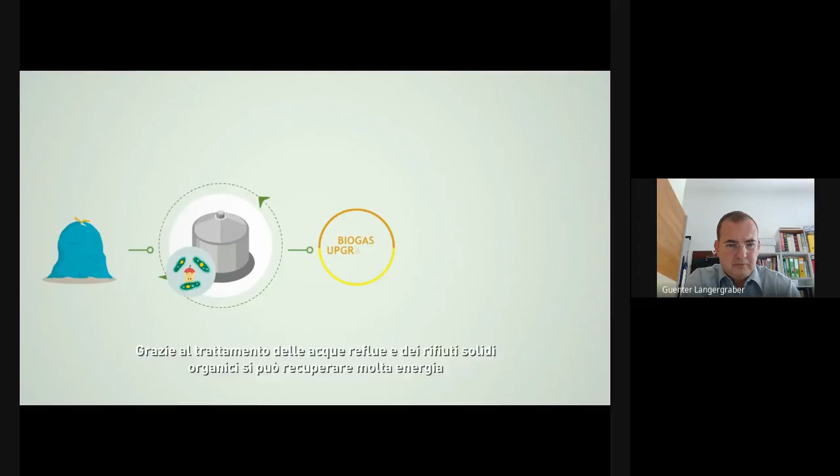Mr. Mayor, the Waste Collection Centre bill has arrived. Mr. Mayor, there is a lot of movement at the treatment center. Oh, how can we keep our city cleaner? Mr. Mayor, we need to update the plan for the Covenant of Mayors. Managing the energetic and environmental situation has become a difficult undertaking. Mr. Mayor, I'd like to show you something. What is this about? With this solution, we can apply circular economy to energy recovery. Thanks to the treatment of wastewater and organic solid waste, a lot of energy can be recovered. We can produce electricity from biogas, create new biomethane and new biofuel as well, and recover heat from the treated wastewater of your city. But how can we do that? With REEF 2W, the European project that gives us the tool to calculate the feasibility and the benefits of applying this method, so that the City Council can adopt the new solution, knowing precisely the investment and the benefits. REEF 2W, an Interreg project, offers the possibility to do a feasibility study and start-up aid to recover energy from wastewater and solid organic waste for a cleaner city in a way that is more efficient and more sustainable.

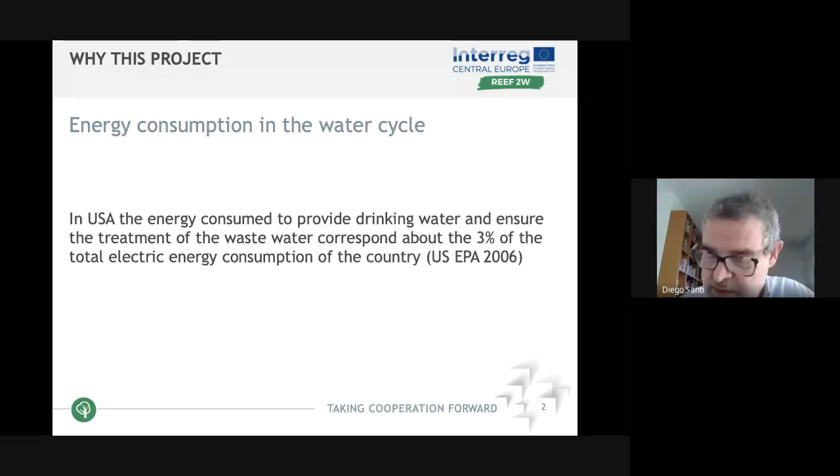The basic concept of the project is quite simple. Wastewater treatment plants and municipal waste plants are great consumers of energy. Here you have the situation in the USA, but in Europe, where we were not able to find aggregated figures, the situation is quite similar.

So a substantial amount of the electrical energy used in various countries is for the treatment of waste. But there is also some potential in the waste. We can, in principle, recover energy - thermal energy, chemical energy, other kinds of energy. The project has the objective of enhancing the energy efficiency of this kind of infrastructure, as well as producing some renewable energy to decrease the impact of the infrastructure on the environment.

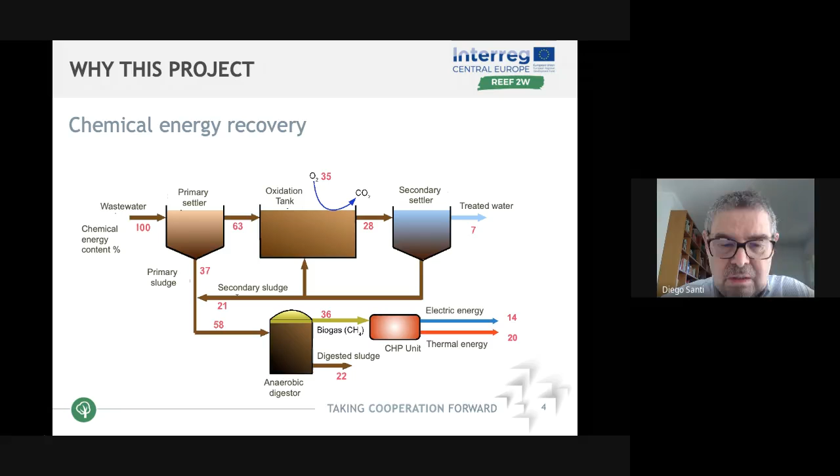Basically, you can recover from biomass and from wastewater chemical energy, producing biogas, and here you can see a principal scheme for the production of electric energy and thermal energy from the biogas.

The project has been set up to enhance this concept and involves 5 countries in Central Europe: Italy, Austria, Germany, Czech Republic, and Croatia. Among the 10 partners of the project, there are 5 private companies involved in the activities, for a duration of 3 years.

The scope of the project is to identify possible critical points for energy efficiency in waste treatment plants, to define strategies and technologies, and to evaluate possible scenarios for the waste treatment platforms, integrating, whenever possible, wastewater and other renewable energy sources. To provide an assessment of the excess of energy available that can be delivered as electricity, heat, biofuel, and so on.

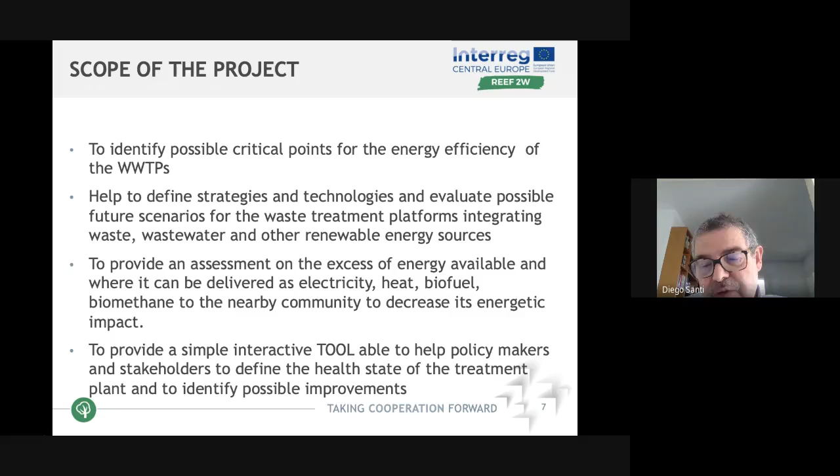To provide tools and methods, interactive tools, able to help policymakers make their decisions. To provide an environmental assessment of the actions implemented. And last but not least, to provide an economic assessment. All of us know the importance of economic issues in municipal life today.

Then we wanted to identify obstacles and barriers from a legislative point of view, and to involve local authorities to test the tool, use it, and contribute to its improvement.

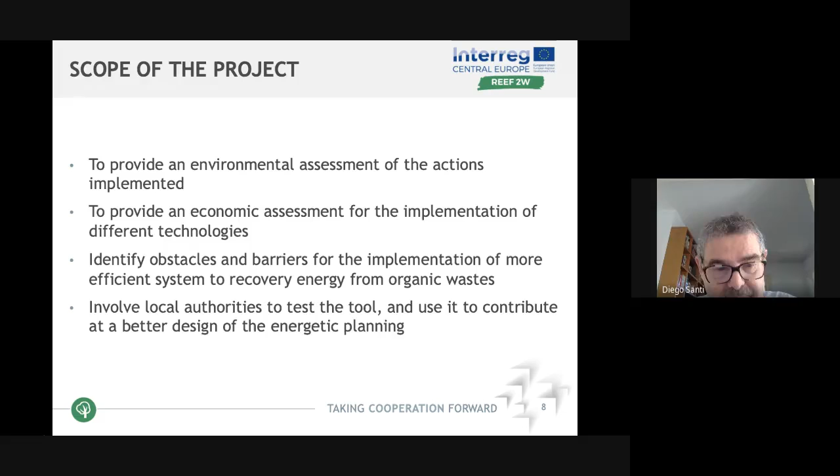In these pilots, we have considered a range of different technologies, but the tool allows for the improvement of these technologies in future, taking into account possible technical developments.

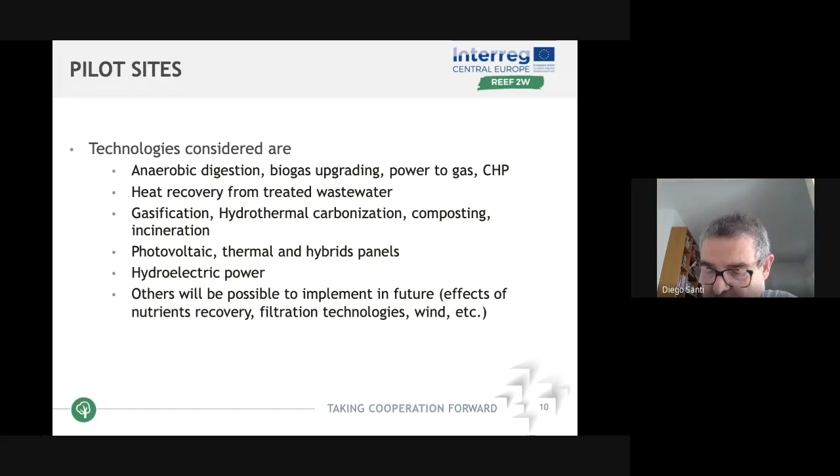The approach used in the project is an integrated sustainability assessment approach. That is, not only technical aspects are taken into consideration, but also the suitability of the locations of the plants and their impact on the landscape and on the territories. The overall environmental assessment and the economic assessment - all these aspects are considered in the tools set up by the project.

And in setting up these tools, we had a strong involvement of the users in the collection of data, but also in checking the suitability of the tools.

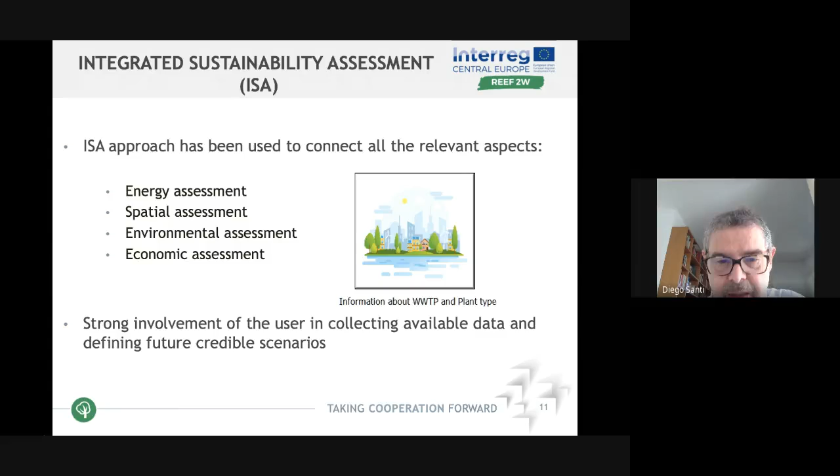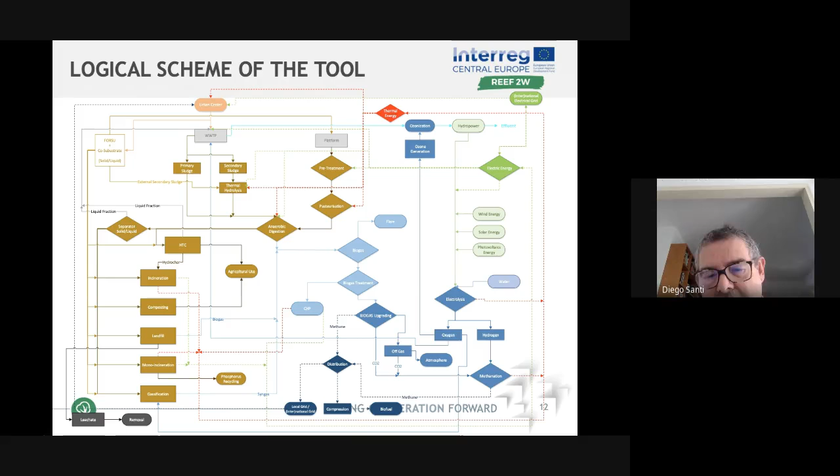This is a general logic scheme of the tools. Don't worry, we don't need to go through this scheme in detail, but in brown you have the waste treatment plants. In blue there is the water and wastewater treatment procedure, and in green you have the output of renewable energy produced.

At the end, you get a report comparing the initial situation of the plant with the future, improved situation, and the comparison is made across all these mentioned aspects.

The project organized a variety of other activities, such as training courses for groups of public administration and stakeholders delivered in all 5 participating countries, training experts and advisors to enable them to assist municipalities wishing to implement this kind of vision, and the setting up of action plans at regional and local levels to enhance the impact of the project.

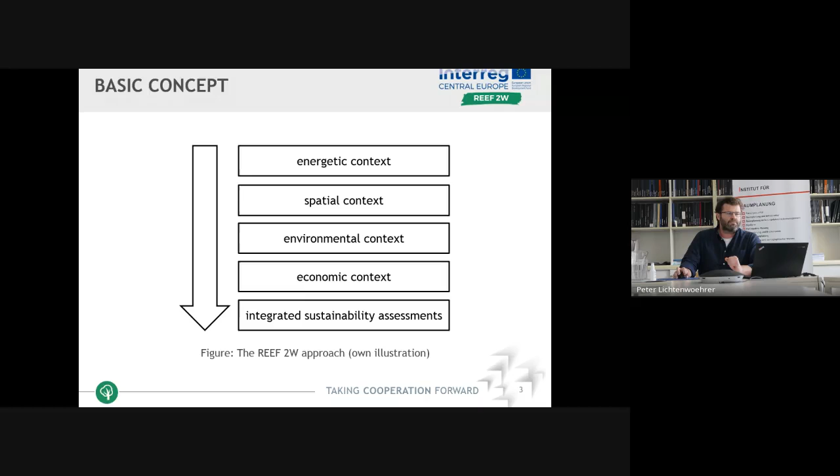We would just give an overview of the most promising path to follow. After our first pre-assessment in the REEF 2W, detailed planning can be the next step. We provide feasibility studies and information on whether it's worth following an idea, or if we should go another way. So this is about the approach.

On my next slides, I'll go into more detail for the different contexts. The first is the energetic context, where we address different issues. The first is energy efficiency. We want to identify optimization potential

concerning the energy use at a wastewater treatment plant. Wastewater treatment plants have different technical processes: pre-treatment, activated sludge process, sludge treatment. They need electricity and thermal energy. In our assessment of energy efficiency, we want to see whether the current energy consumption is efficient or if there is optimization potential.

The second thing in the energetic context is we want to identify all the available resources for the generation of renewable energy. Many treatment plants across Europe are already equipped with anaerobic digestion - we'll go back to that in the third presentation today - but it's not only about anaerobic digestion. We have different types of resources, like wastewater heat, solar energy, and more. We want to identify all the available resources at the treatment plant.

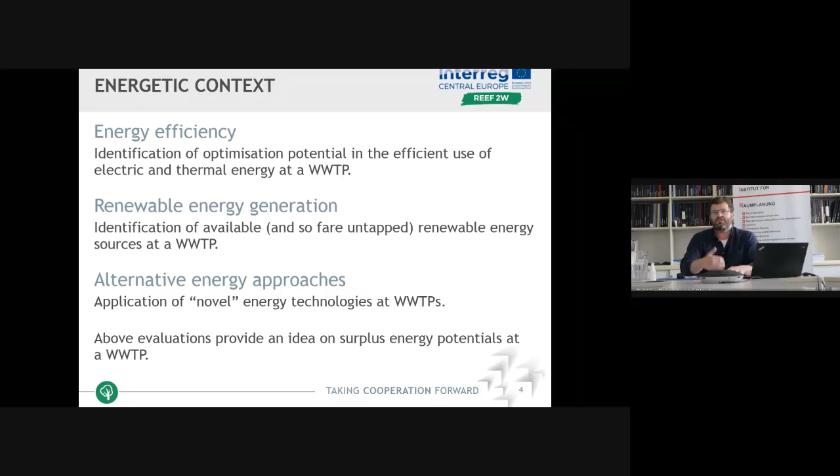For energy efficiency, it's about comparing the electric and thermal energy consumption at the wastewater treatment plant. Either we look at the entire plant or at selected treatment technologies, and we want to compare the current energy use with standard ranges.

We have different treatment steps, let's say energy consumers at the treatment plant, from an electrical and a thermal point of view. We have energy consumptions for mechanical pre-treatment, for biological treatment, for sludge treatment, and so on. We indicate energy consumption ranges for the different steps, or for the treatment plant as a total.

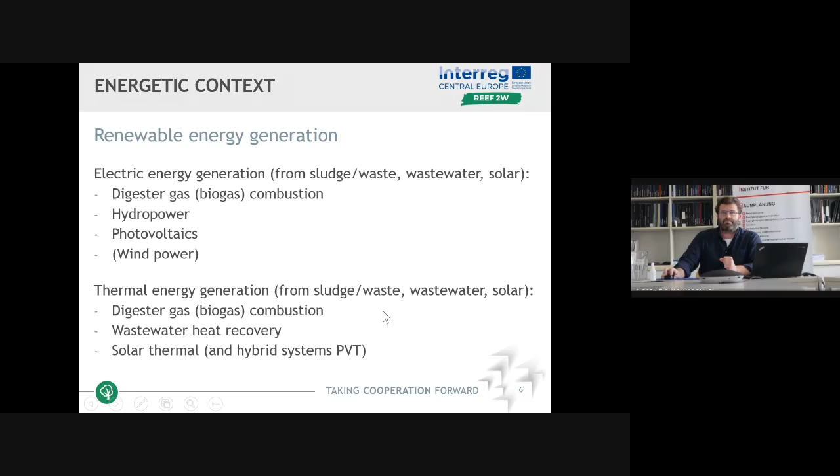So these are the two aspects: basically, we can provide electric energy and thermal energy. The biogas has a special position here, because we can also leave the biogas, upgrade it, and use it for feeding into the existing natural gas supply network, which brings me to the last aspect of the energetic context, the alternative energy approaches we consider in REEF.

The biogas upgrading can be one thing. Of course, it's quite obvious we could use the available digester gas in a CHP unit, combined heat and power unit, to produce electricity and heat. But we can also upgrade the biogas and feed it into the public network, which can be an alternative approach.

One important thing is that we want to increase the yield of biogas generation. We want to improve the digestion performance, and for that we address, in the REEF2W approach, the co-digestion and hydrolysis of the sludge or waste. The goal is to increase the biogas, because more biogas means more gas to be fed in, or more gas available to generate electricity or heat.

Another aspect is energy generation out of sludge. Sludge is a big issue; it has to be disposed of as well. Of course, anaerobic digestion of sludge has already been mentioned, but gasification or incineration of sludge can also be used to generate energy. Gasification can provide additional gas, for instance, and incineration is a big issue when also dealing with the phosphorus recovery approach—we have to incinerate the sludge.

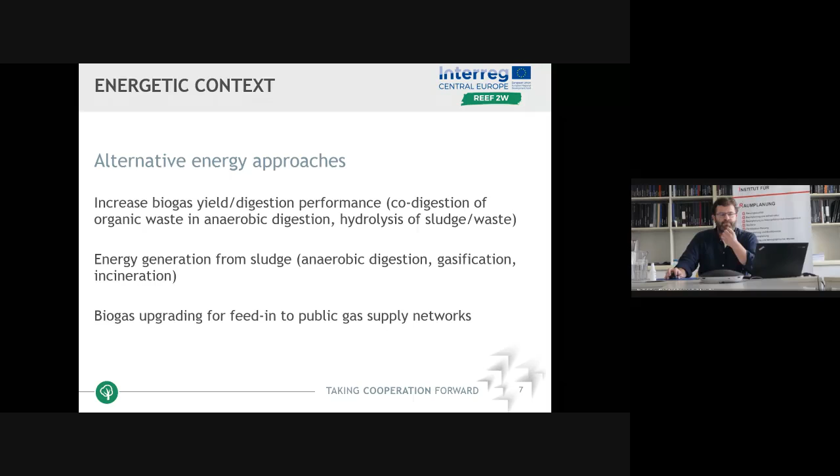But it's not only about the availability of surplus energy, it's also about the availability of energy consumers. Because if I have a lot of surplus energy but no consumers around, that makes things difficult. Maybe not so difficult for electricity supply, because electricity can easily be fed into the grid and transported over very long distances. Same for the treated biogas. But for heat, it's of course a bit of a different issue.

The heat is therefore very important. Diego also showed it on one slide, and we will also address this issue in the third presentation today. We have electricity at the treatment plant, but the treatment plant has high electricity needs, so usually it is very, very difficult to cover the wastewater treatment plant's internal electricity demand.

For selling the treated biogas, the gas can also be transported, but then the gas is missing at the treatment plant. So the question is always, is it economically interesting for me as an operator of a wastewater utility to sell the biogas? Because if I sell my biogas, I have to get the electricity and heat I need on my plant from other sources.

But what we have, and what Diego nicely showed on one slide, is a lot of heat available at the wastewater treatment plant, way more heat than can ever be used internally. So when dealing with efficient use and energy supply from wastewater or waste, we have to address heat supply. And for heat supply, the supply distance is an issue because we have heat loss.

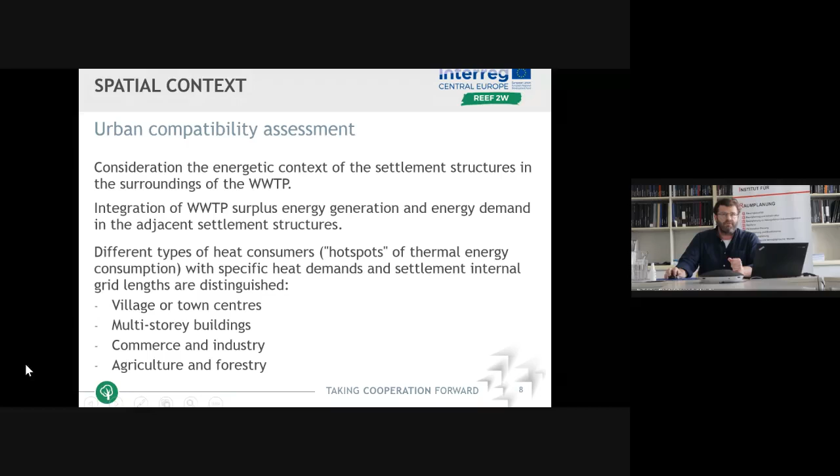Before we go on further, I just want to give you a short idea on this spatial context. We defined not only these different types of consumers, but we also tried to find good pictures, so that the user, the planner, or a municipality gets an idea from his ortho photograph: I have, in my specific context, this type of settlement structure, and out of the REEF2W, one can easily get the information on what the average heat demand of such a settlement structure is.

So it's basic information to make a rough estimation of whether my heat demand can be covered totally, or at least to a certain extent. This is what our spatial assessment basically is about.

And as I said, if the supply side and the demand side fit together, if we have surplus energy and related energy demand, we go a step further - then we can go to the environmental context and check the environmental benefits of our dedicated supply scenario.

To evaluate the environmental benefits, we actually address climatic benefits, in terms of CO2 emissions and global warming potential respectively. A suitable method to address these environmental or climatic benefits, in our point of view, is the life cycle assessment.

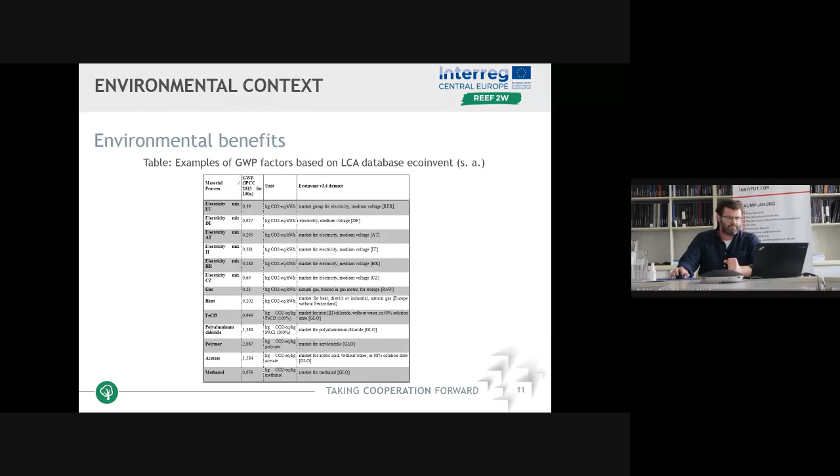In parallel, we are of course interested in the economic context. This is always a big issue. So what are the costs about? So the economic context in the REEF 2W should give us an idea of the economic opportunities of investigated supply scenarios.

We want to consider the economic aspects of the wastewater treatment plant-based renewable energy supply. For that, we have to define investment costs and operational costs, and we also have to consider additional income, which can come from, for instance, sell of excess energy, we sell excess heat, or we sell upgraded biogas, or we can also save some money when we improve our internal energy performance, when we have some energy savings. This has all to be considered and addressed in evaluating the economic opportunities.

And in our REEF 2W project, we also define cost ranges, which can be applied to the different supply scenarios, to the different technologies, and those will help us then to make first estimations on the costs of a specific scenario, and it will help us to compare the costs of different scenarios, then to get an idea which seems to be more interesting from an economic point of view.

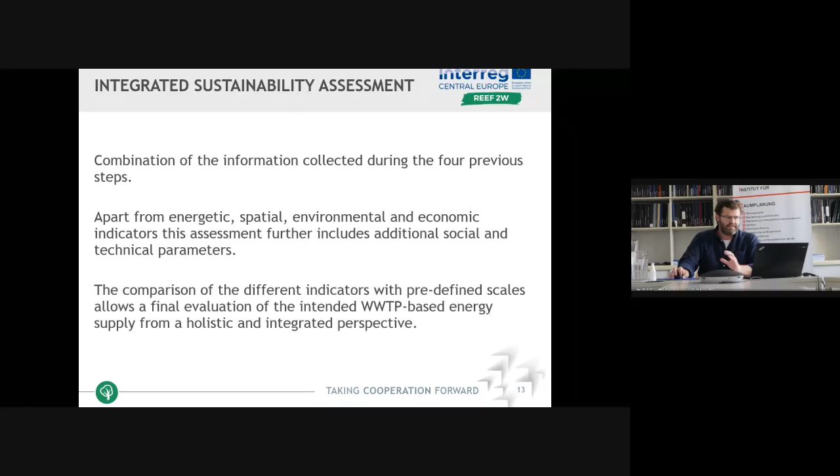So these two approaches are possible in the REEF: a more general view where we leave the detailed decision to the local stakeholders, or a less flexible, more strict approach, where we suggest weighting factors and REEF provides then somehow a final idea which are the most promising solutions. So this is the basic idea of integrated sustainability assessment.

To summarize this approach in a figure, I want to show you this pyramid. We start at the base with a pre-assessment on some general indicators. These general indicators give an idea whether it's worth going a step further. If these indicators are fine, then we continue with the assessment.

We have specific indicators that address environmental or climatic issues, social aspects, economic and technical aspects. Technical aspects primarily concern energetic aspects. Out of these different indicators we can make the decision on the most promising, most sustainable supply scenario.

Either we weight these aspects directly, or we don't weight them in advance but provide all the different indicators in a traffic-light-like scheme. Then we have a big picture with all the indicators in traffic light colors - some parts green, some red, some yellow. The local decision makers then have the opportunity to say, okay, this is quite yellow, but it's not so important for me because this issue is important in my context. The color is not so important, the context is important. So the local decision makers can really include their local boundary conditions and perceptions in decision making.

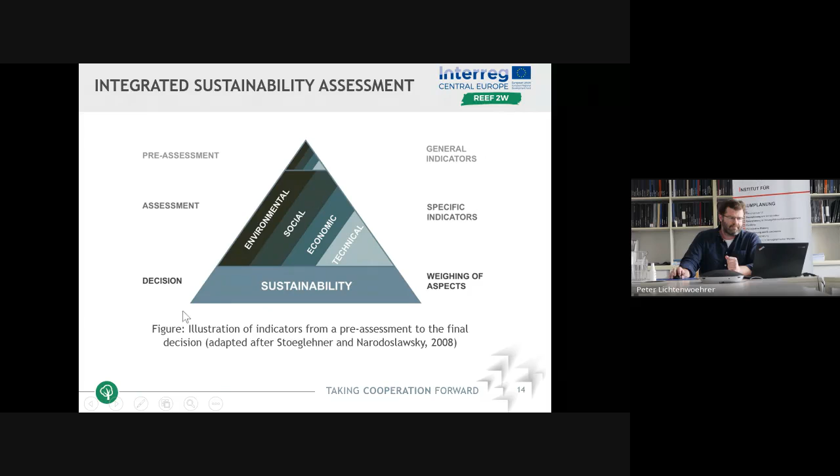So this is the basic idea of the integrated sustainability assessment - to define indicators for all the different perspectives or contexts we address in REEF2W, to finally allow a decision from an integrated perspective, to get an idea what the most promising scenarios are to be followed in subsequent detailed planning.

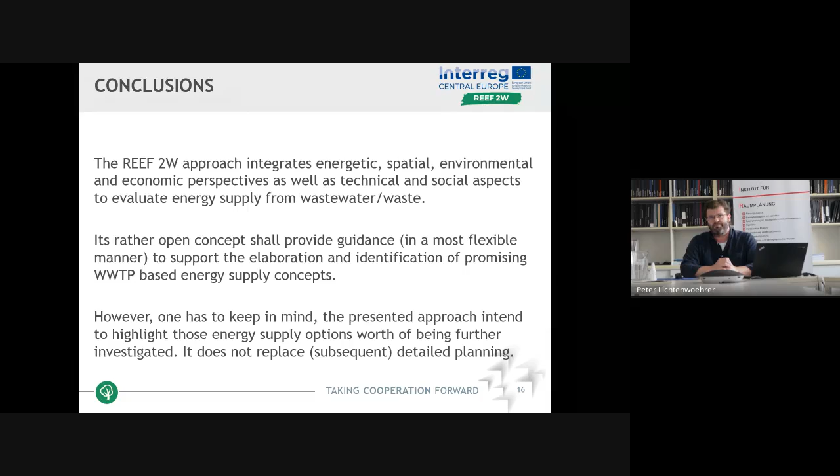The local operator should keep his freedom anyway. So one has to keep in mind, our REEF2W approach intends to highlight the most promising energy supply scenarios, the most promising options for how to integrate wastewater treatment plants or waste plants into a local energy supply concept, but it does not provide the best final solution. We do feasibility studies - we want to highlight those options which are worth further following into detailed planning. So this is what I had.

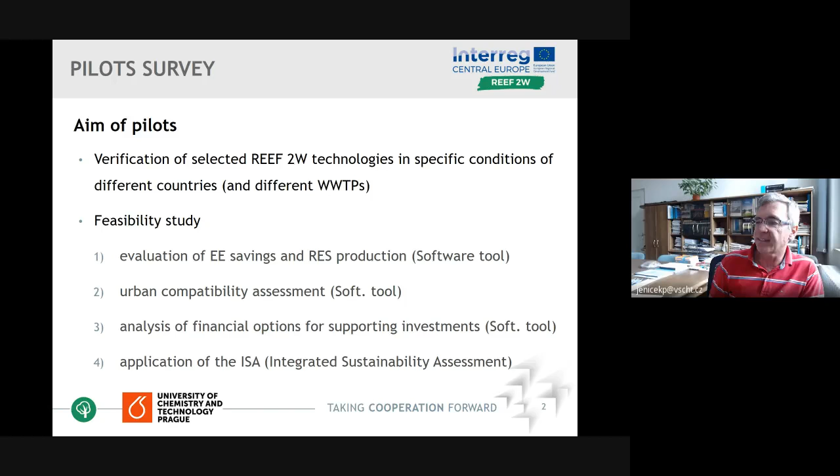So in this part we are able to compare the status quo and the innovative technology which is tested from a holistic point of view. In this short introduction I don't want to go too much in detail, so now we will present this pilot. Each project member country evaluated a specific type of technology in a pilot.

As you can see, in Austria the pilot was focused on thermal energy recovery from wastewater. In Czech Republic it was biomethane production, upgrading of biogas to biomethane. In Germany, thermal hydrolysis and power to gas technology. In Croatia, co-digestion, and in Italy, biogas production optimization. So this is a very brief introduction of the case studies and pilots, and now we will introduce them country by country.

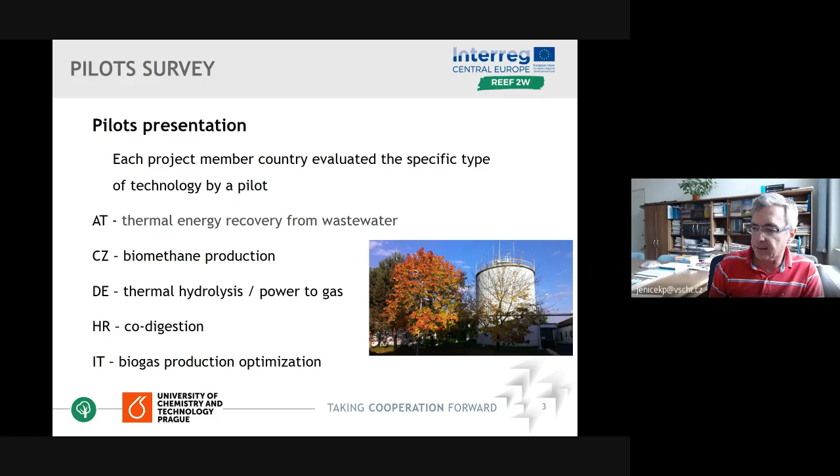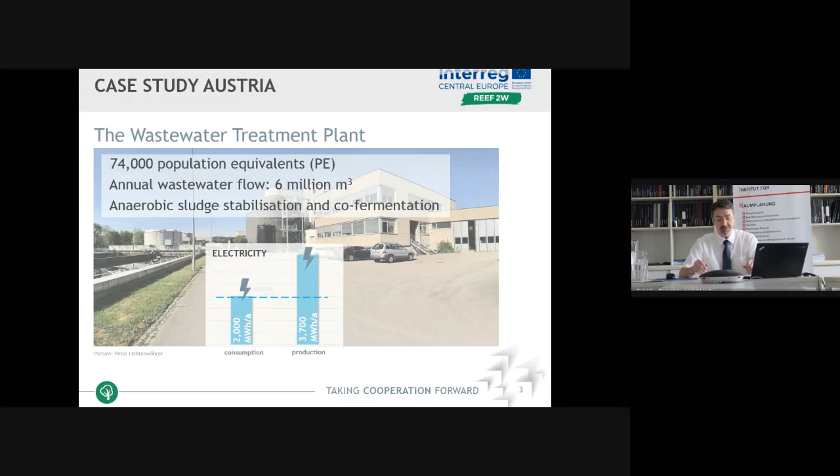Only at certain times over the year is it necessary to purchase relatively small quantities of electricity from the grid. Feeding in of surplus electricity into the grid is easily possible, but feed-in tariffs have become extremely unattractive in recent years, so it is interesting to strive for other own usage possibilities.

Concerning the heat side, wastewater treatment plants with digesters have considerable heat demands, but due to the co-fermentation in the Austrian situation, heat surpluses can also be achieved in the pilot case.

But for making use of heat surpluses, it is necessary to design the respective heating networks to supply other consumers. A first step in this direction was already taken by the wastewater treatment plant, in our case study, by supplying a nearby located farm.

The aim of our pilot action in the REEF project was to explore further possibilities to increase, on the one hand, the energy output, and to make visible, sensible uses of the respective energy surpluses.

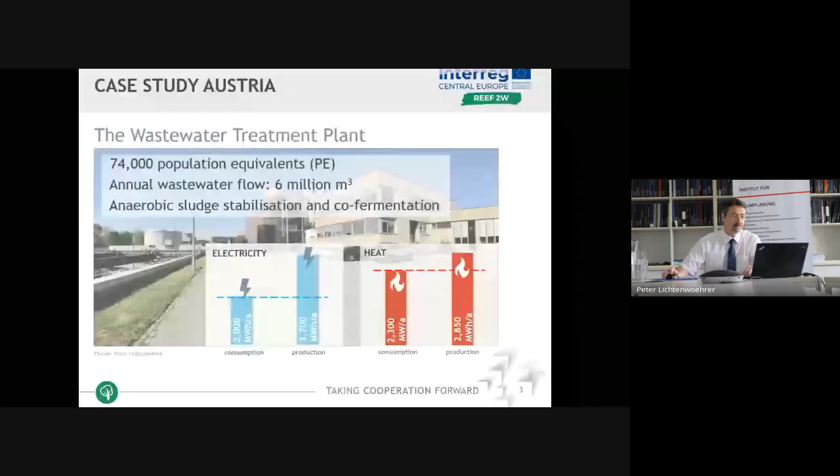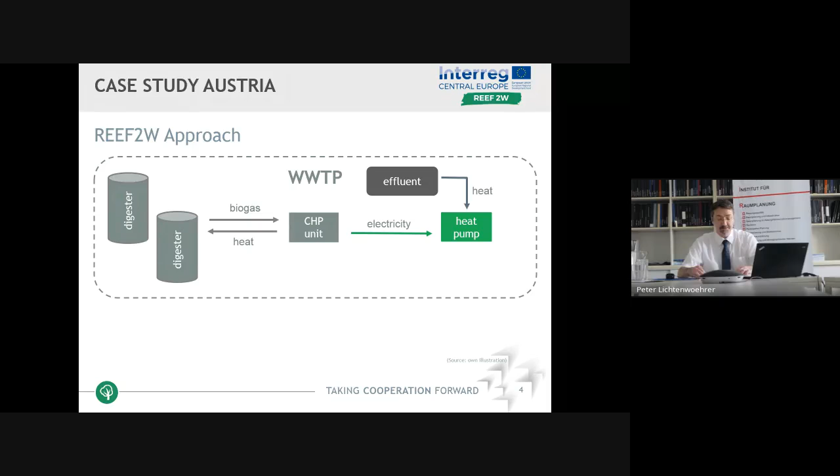This enables recovery of ambient heat contained in the wastewater, and of course is connected to further electrical energy demand for this purpose, but this can partly be covered already by the surpluses of electricity generated in the wastewater treatment plant.

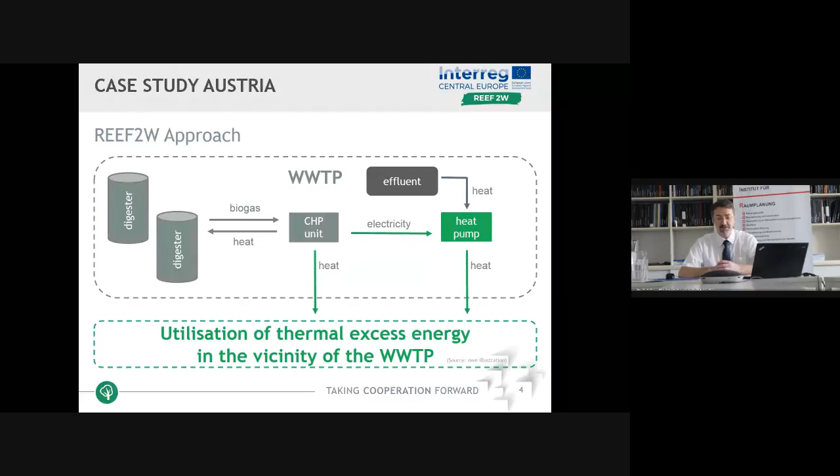In this way, the wastewater treatment plant can also provide more heat to external consumers, and in this way can assume a supply function in the local energy system.

The next slide should illustrate this potential of wastewater heat recovery. We have a mean wastewater flow in our case of around 6 million cubic meters of wastewater, and this volume is steadily available. This effluent is discharged continuously.

When we look at the average temperature of the wastewater, over the year it is around 14 degrees. In the winter months it's a little below 10 degrees. We can make use of this thermal energy, extracting it from the wastewater by means of a heat exchanger. For instance, as indicated in this illustration, a reduction of 2 degrees...

Georg, the microphone is not switched off at the moment. It was maybe... automatically.

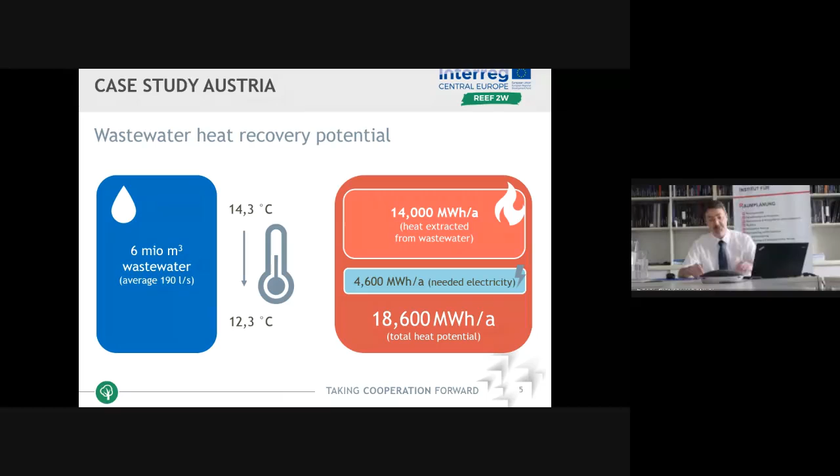And then the question arises only whether there are corresponding heat consumers located around the wastewater treatment plant, and therefore it is worth looking over the edge of the wastewater treatment plant. This is what we have done in our case study, applying a spatial analysis.

From our case study, it can be concluded from the REEF2W approach that, on the one hand, from an energetic point of view, wastewater heat recovery increases energy efficiency. It makes it possible to use not-yet-used energy sources, as the heat contained in wastewater becomes accessible. In economic terms,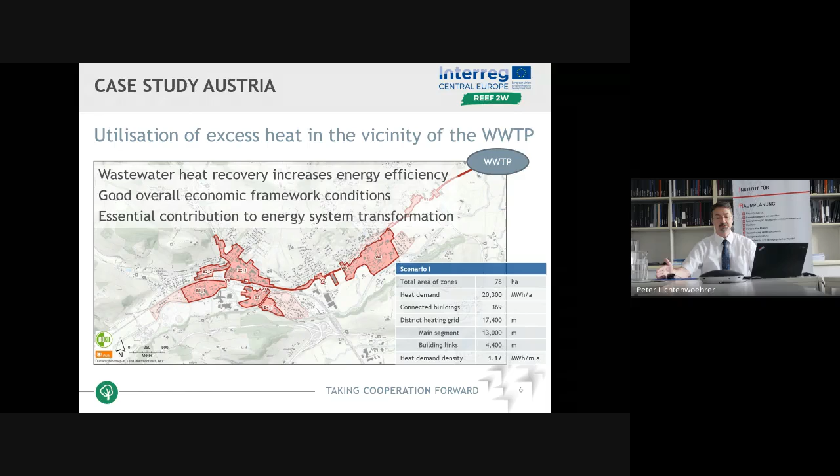So, a very short, brief introduction of what comes out of the Austrian case: that REEF 2W solutions, addressing the so-far untapped wastewater energy potentials, could make good contributions to sustainable energy supply.

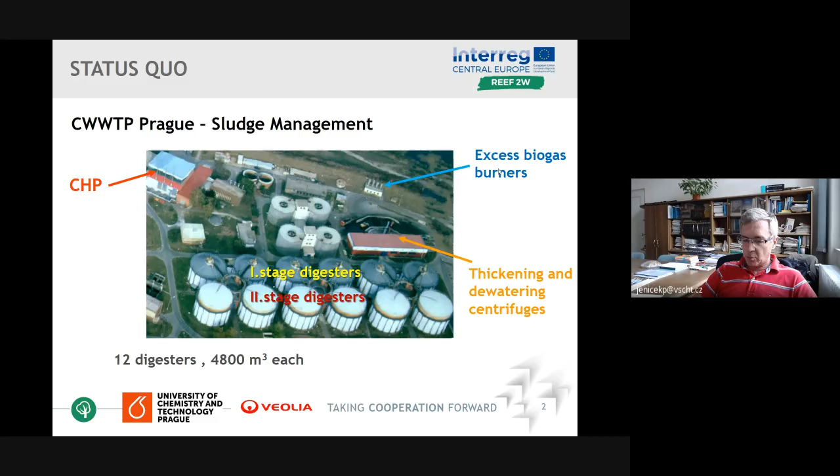So this was the reason why we decided to focus our case study in Prague on upgrading biogas to biomethane, and the main objective was the assessment of energy valorization of excess biogas through this upgrading technology. So what are the current data about biogas production in Prague?

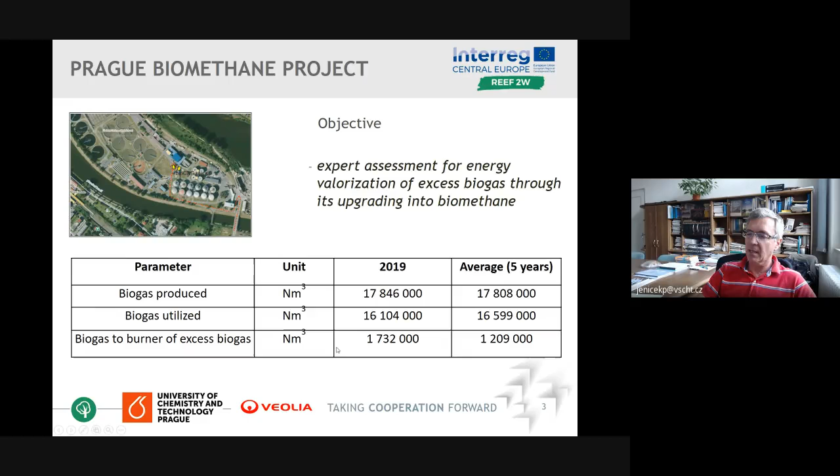Nowadays there is an annual production of biogas of about 17 million cubic meters, but the capacity of the CHP unit is not sufficient, as I mentioned, so biogas utilized for electricity and heat production is only about 16 million. So the biogas which is burned as excess biogas is almost 2 million cubic meters nowadays. On average for the last 5 years it's a little bit lower, but still a very significant excess of biogas production.

In fact, there are two ways how to solve it. One of the ways was increasing the capacity of combined heat and power production, or application of new technology.

In Prague, because of the aim of diversification of biogas use, it was decided to test the technology of biogas upgrading. So here is the pilot unit for the verification of this technology. And what were the pilot achievements, or what data can we find?

It is necessary to stress that we are comparing two scenarios: either the biogas is incinerated, or this part of excess biogas, which is only about 10 to 15% of produced biogas and is now not used, is upgraded. So the capacity of the biogas upgrading unit is 20 to 250 cubic meters of biogas per hour.

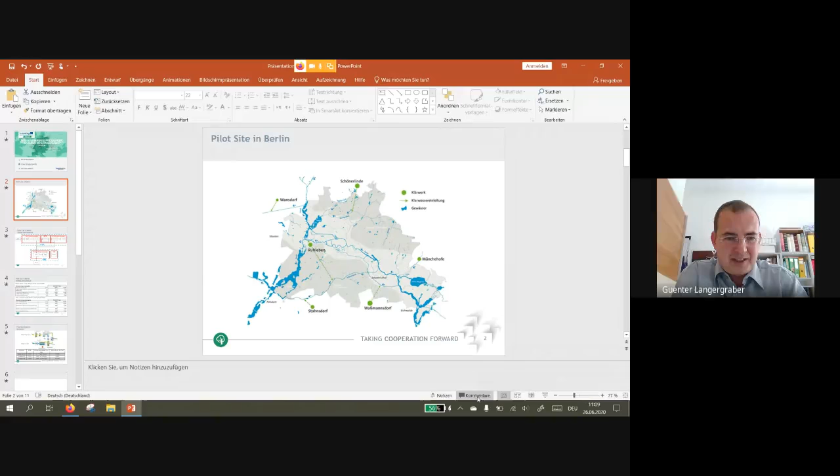So Mehdi, please. Can you hear me? Yes, we can hear you. Okay, now it's... so you can see my presentation? No, we almost saw it, but now it's gone again. Ah, okay, so I'll try again. So, now? Yes. Okay, perfect, let's start.

Thank you, and let me briefly introduce myself. I'm Mehdi Habibi from Competence Center of Water Berlin, and today I would like to present the case study in Berlin.

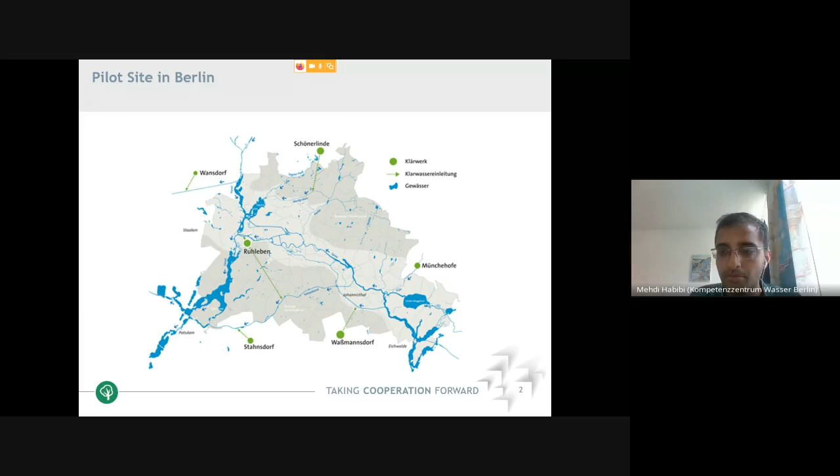First of all, the selected wastewater treatment plant is one of the 6 operated by Berlin Water. Let me give you some background information: this wastewater treatment plant consists of mechanical treatment, biological treatment, and advanced treatment. We also have a digester for the biogas, which is produced and used in the CHP system.

It was also important to know the energetic data, so as you can see, I show you this energetic data. Most of the energy is used in the biological treatment, and these 3 steps include almost 81% of energy, while the digester and digestion consume about 19% of energy.

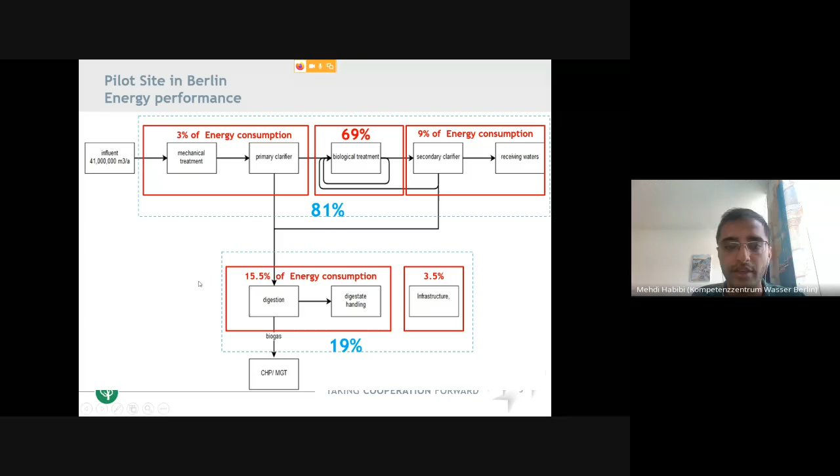So we also used this data in our REEF tool, first to check up the energy situation in this wastewater treatment plant. As you can see, this wastewater treatment plant consumes about 23 kilowatt hours of electricity per year.

And as you can see, it was in the standard range in the REEF tool. Also regarding the thermal energy, as you can see, it's about 13 kilowatt hours per year, and it's also in the range, in the middle of this range. So as a whole, we could say that this wastewater treatment plant performs well.

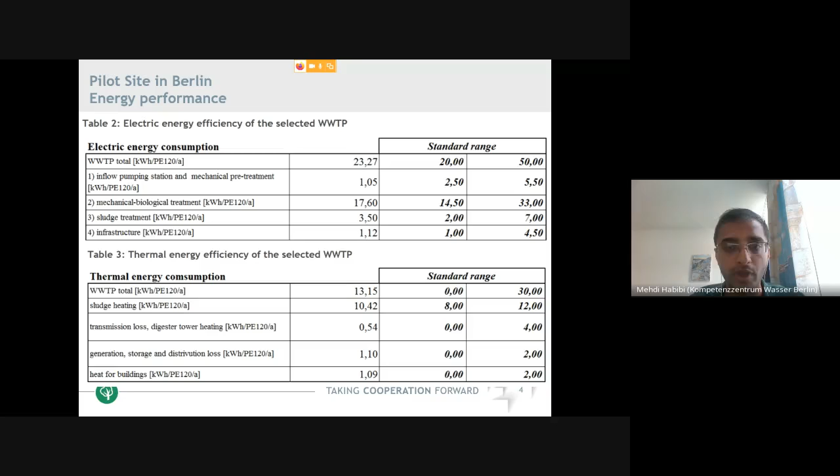In the next step, as you know, in Germany the regulation is changing. So for many wastewater treatment plants and also biogas plants, burning the biogas in a micro gas turbine or CHP plant is not sensible.

So the other options are to upgrade this biogas or inject it into the gas grid. In the case study in Berlin, we tried to test 3 options: thermal hydrolysis, biogas upgrading, and power to gas. Because of time, I'll just present 3 scenarios that we selected for today.

The first scenario is biogas upgrading: we take the biogas, desulfurate it, and after separating the CO2, inject it into the gas grid. We also considered power to gas, which is important with the new strategy in Germany. Water goes into the electrolyzer and is separated into hydrogen and oxygen, and we take this hydrogen into our biological methanation process with the CO2 from biogas upgrading to produce more biomethane.

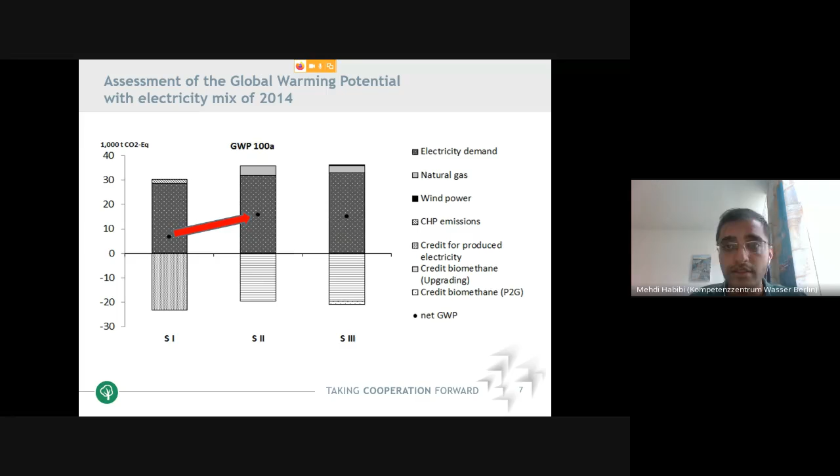In the next step, we also compared the electricity mix of Germany in 2030. We have a lot of renewable energy, so it would be a good option. We can reduce the global warming potential in this plant if green electricity is in the grid. And also with power to gas, you can see we can decrease the global warming potential in this plant.

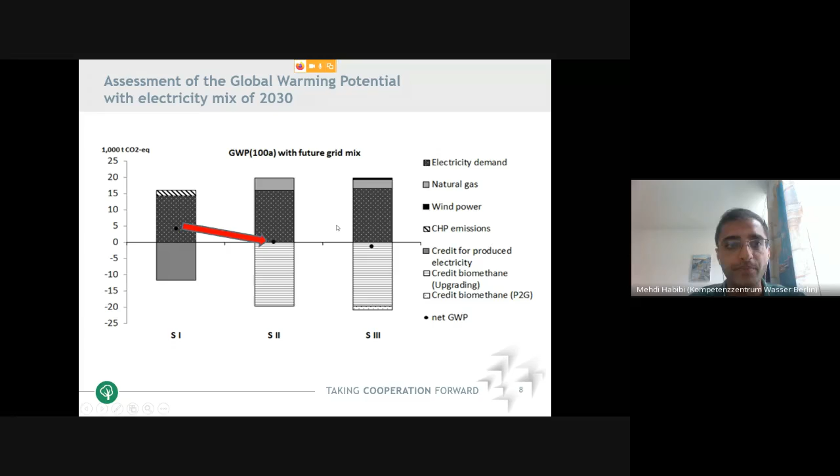So as a take-home message, biogas upgrading and injection into the gas grid at the moment shows no reduction of global warming potential. It's better to produce electricity with the CHP system and substitute the current power mix with its high global warming potential.

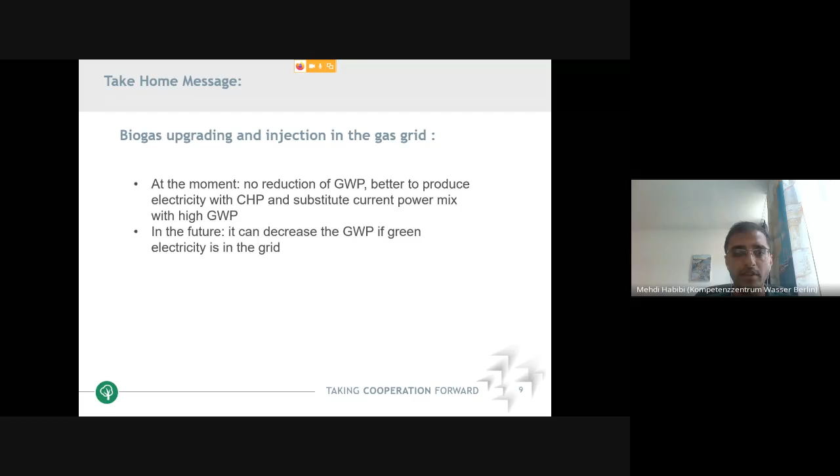But in the future, in 2030, it can decrease the global warming potential with green electricity in Germany. And regarding power to gas, it can decrease the global warming potential, but only if the electricity used for this process is green, renewable electricity.

We also did a lot of economic research for this process, but at the moment power to gas has high investment and operating costs, so it's not currently a good option.

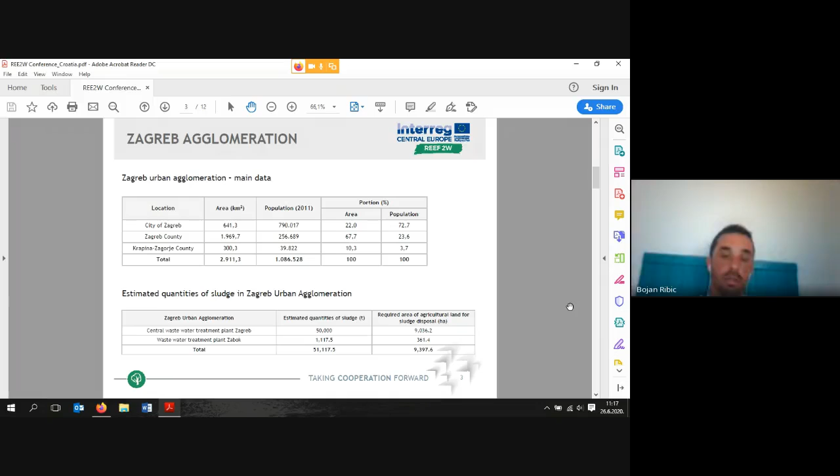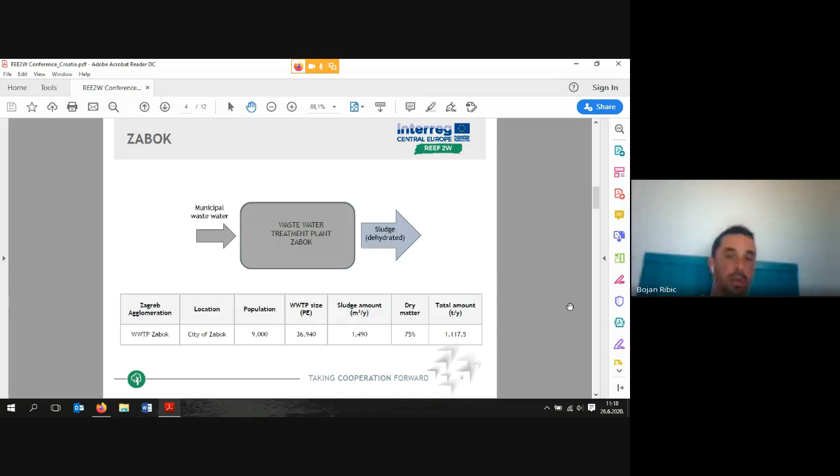Zabok wastewater treatment plant, as I said, they are doing the usual wastewater technology for the wastewater treatment plant. Their population is around 9,000 inhabitants. Size of the wastewater treatment plant is much larger due to the fact that they have plans to use the wastewater from other areas in this county, and these are the sums. In the table you can also see some other figures, especially the sludge amount and the total amount that will be expected annually.

First thing is, as Pavel mentioned earlier, in the Croatia case the focus is on co-digestion. So first thing was to introduce the possibility to use a bio-waste fraction of municipal waste. In Croatia, regarding waste management since 2017, we have a legal obligation to start to separate our bio-waste. So we saw this as one big energy potential to be used in the wastewater treatment plant if possible.

Other thing is anaerobic treatment. As I said, we have an obligation to build a lot of wastewater treatment plants in Croatia, but usually anaerobic treatment is not something that's been considered so far. And of course, the idea is to have co-digestion, sludge and bio-waste.

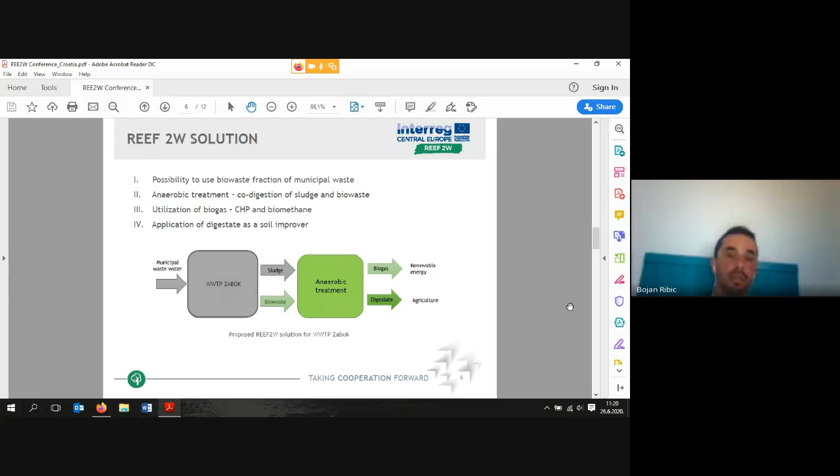So the idea is to use it as a soil improver in agriculture.

So we did a really deep analysis of all the information, all the data that we had about the mentioned location. Total amount of the municipal waste, the potential of the bio-waste, the expected amount of the bio-waste, also of the collected waste, and of course we did the biogas potential. All of this information is part of our case study, and they are all part of the feasibility study that we did, focusing only on the wastewater treatment plant in Zabok and the potential that they have at the moment.

We did also the calculation for that, and of course, as I mentioned, we are thinking that some land is necessary to utilize the sludge. So we also did a calculation of how big the land size should be to properly use that increase of sludge production.

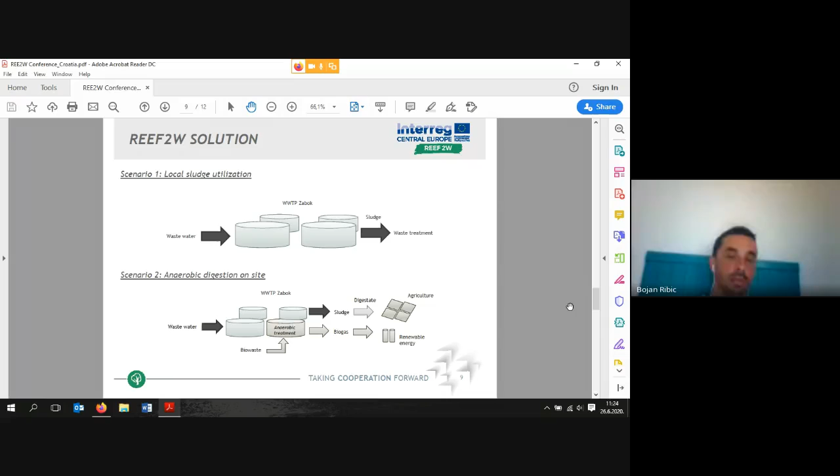And the third scenario was something a bit different. So we said, okay, if it's a problem to do any extra construction in the current wastewater treatment plant, let's then use the sludge and the bio-waste in the dedicated biogas plant that is existing at the moment. But of course, this is a remote biogas plant.

In Croatia, we have, I think, about 30 biogas plants. Their main source of energy is energy crops. We haven't had so far any construction of biogas plants that can also use the bio-waste, especially the municipal bio-waste.

But this is something that will, I'm sure, arise in the future, and there will be more and more biogas plants, or maybe the current biogas plants will be upgraded in order to be able to utilize and treat the separately collected bio-waste from the municipalities.

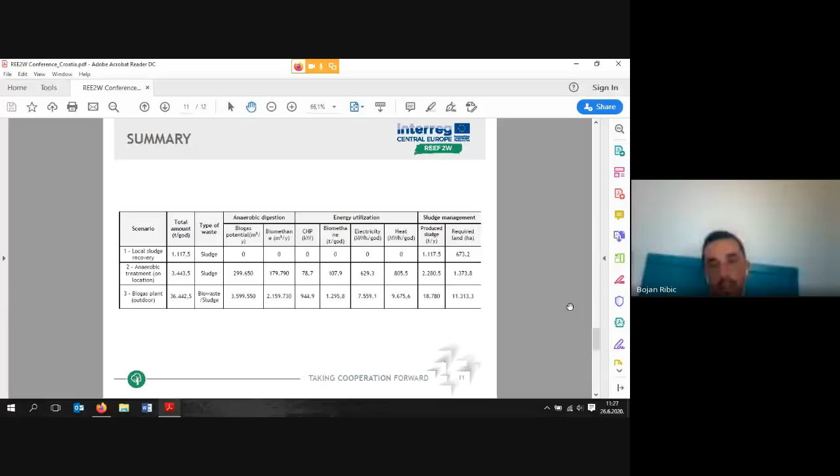And then, last but not least, we move from Zagreb across the Adriatic Sea to Montefeltro, close to Rimini, and Daniel Limongi will present us the case study from there.

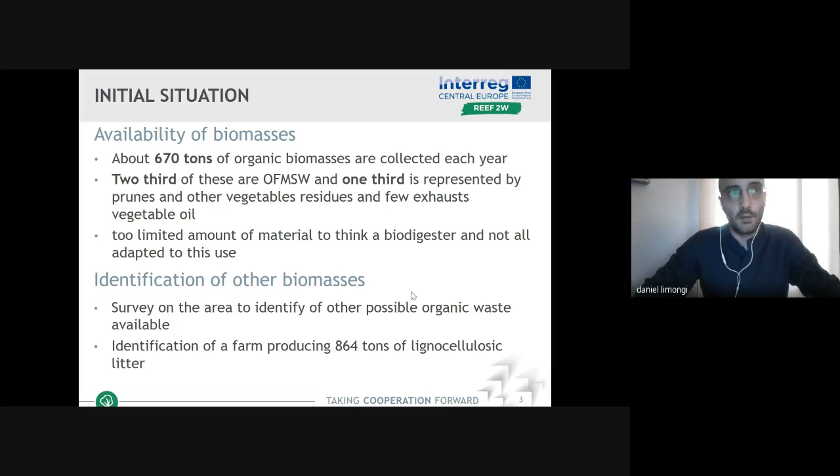The collected waste contains a large proportion of dry organic waste that unfortunately cannot be used for anaerobic digestion. I'm talking about 670 tons of organic biomass, divided into 2/3 organic fraction of municipal solid waste, and 1/3 represented by prunings and other vegetable residues and a small amount of exhaust vegetable oil. To increase the energy production potential, not only the collected dry organic material was considered, but also the availability of other lignocellulosic materials collected from agriculture or industrial activities.

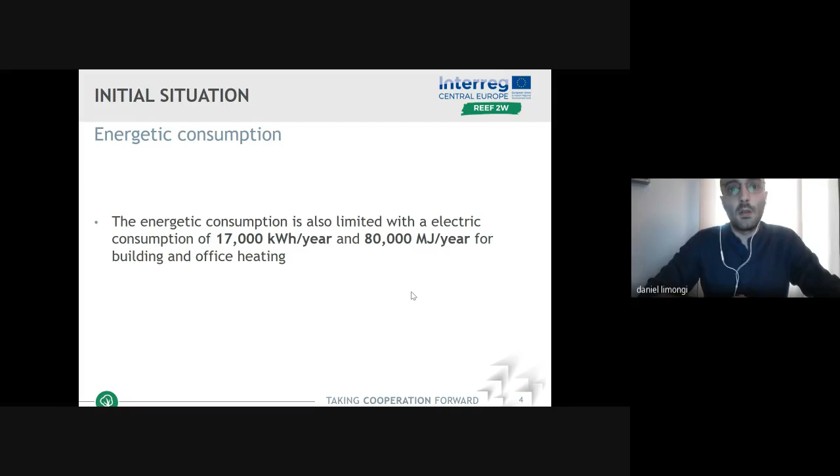The company has already conducted a survey of the energy consumption of the different production facilities and offices. The results highlighted the following average values per year. There is no energy production at the plant at the moment. There is a plan by the company to relocate different working sites and offices into one place to optimize space and working time.

For this reason, there is strong interest in evaluating the possibility of identifying technologies capable of recovering energy from collected waste. Gasification technologies represent one of the most probable options, as they can be used with locally available materials, offer the possibility of combined electricity and heat recovery, and can be switched on and off as required. Another interesting aspect of the gasification process is that the end products are ash and biochar.

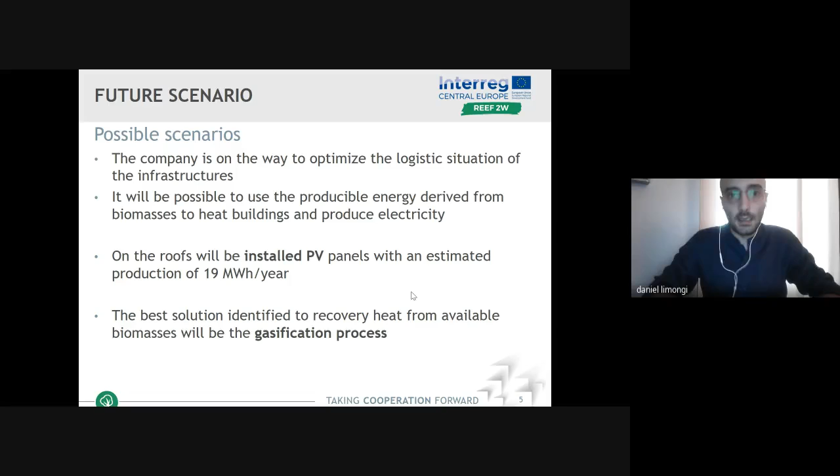The ashes provide inorganic elements that can be reused in agriculture and could also be used as inert material in building or road construction. Biochar is a carbon concentrate that can be used in agriculture to retain carbon for neighboring plants. All three scenarios we evaluated in terms of gasification involve energy production from photovoltaic for a total of about 19 megawatt-hours per year. Three different scenarios are considered.

In the first scenario, only the biomass already available at the treatment plant, without the organic fraction, has been considered. In the second, the available biomasses have been integrated with exhaust mushroom litter. In the third scenario, all available biomasses, including the organic fraction of municipal solid waste, were considered.

This section will provide a brief analysis on the advantages of renewable energy use in the treatment plant of Montefeltro Servizi, according to the results obtained using the REEF 2W tool. The results are based on actual energy consumption provided by the company, and take into account the possibility of installing photovoltaic panels on a roof area of about 100 square meters, and a gasification system that can be used with available organic waste. The following graph shows the total energy consumption in kilowatt-hours and in standard cubic meters.

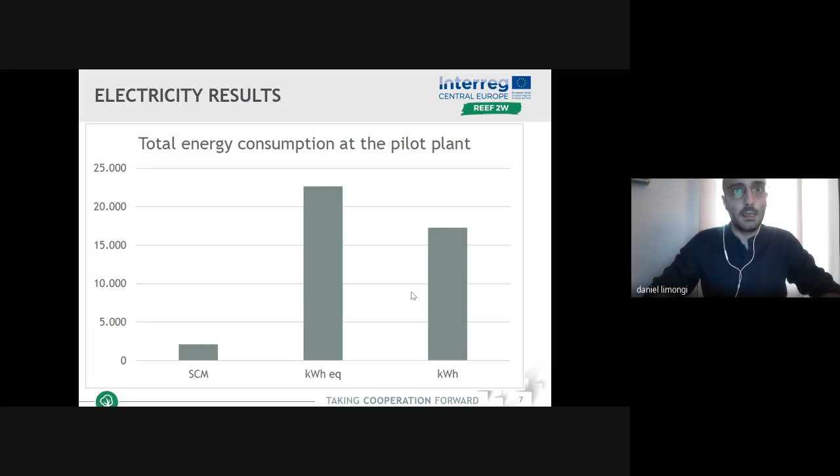For a simpler comparison of the two values, standard cubic meter is given in kilowatt-hour equivalent. The potential energy produced by photovoltaic panels could reach about 19 megawatt-hours per year, sufficient to cover almost 4/5 of the company's total energy consumption.

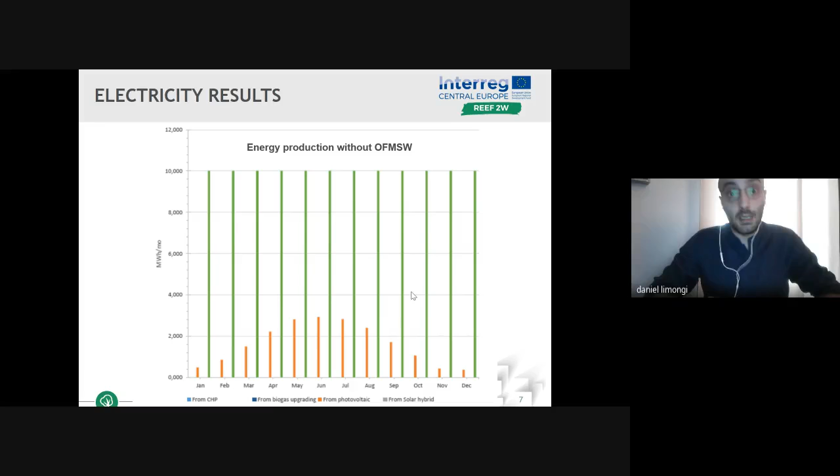Furthermore, the energy recoverable from biomass gasification is about 10 megawatt-hours per month in electricity and about 19 megawatt-hours per month in thermal energy. Considering all values, the total energy producible in the pilot cell could be 127 megawatt-hours per year in electricity and 119 megawatt-hours per year in thermal energy.

In the second scenario, with the mushroom litter, the total available energy could be about 550 megawatt-hours per year in electricity, and about 570 megawatt-hours per year in thermal energy. From the later scenario, it can be seen that potential energy production of about 1,025 megawatt-hours per year in electricity and 1,136 megawatt-hours per year in thermal energy would be possible.

It is interesting to know that from the first scenario to the third, the scale of the energy production has changed considerably, so much so that the energy production from photovoltaic is almost idle.

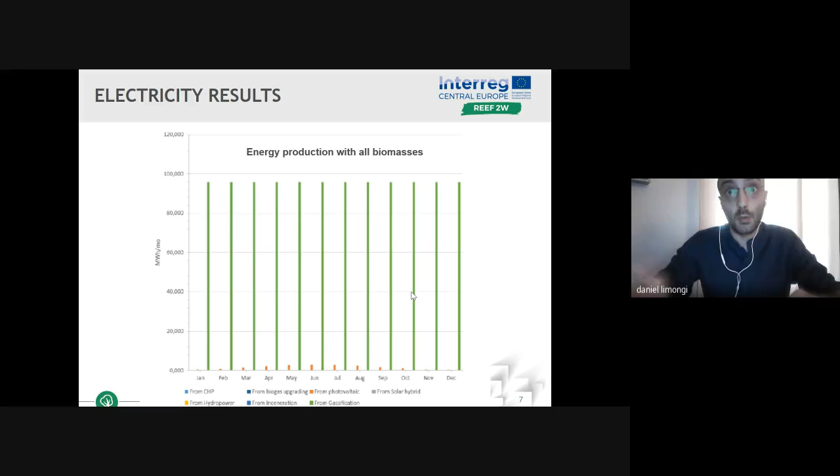So, if the possibility to sell the electric energy to the grid exists, it could provide an economic advantage. The possibility of selling the generated thermal energy to third parties is much more complicated due to the orographic situation of the valley and the long distance that must be overcome.

So, the pilot case in Emilia-Romagna region was conceived by Montefeltro Servizi in the framework of a general renovation plan of both the waste collection service and the internal organization. The investments include new vehicles and facilities for about 2,300,000 euros.

Concluding, the pilot case proposed by Montefeltro Servizi fits very well in this context. On one end, the renovation plan improves both the quality and the quantity of the organic waste. On the other end, the REEF 2W installation has the potential for producing an amount of energy to generate savings.

Finally, this way, the Emilia-Romagna pilot can represent a sustainable model for small multi-utilities. With this, I've concluded, and thank you for your attention.

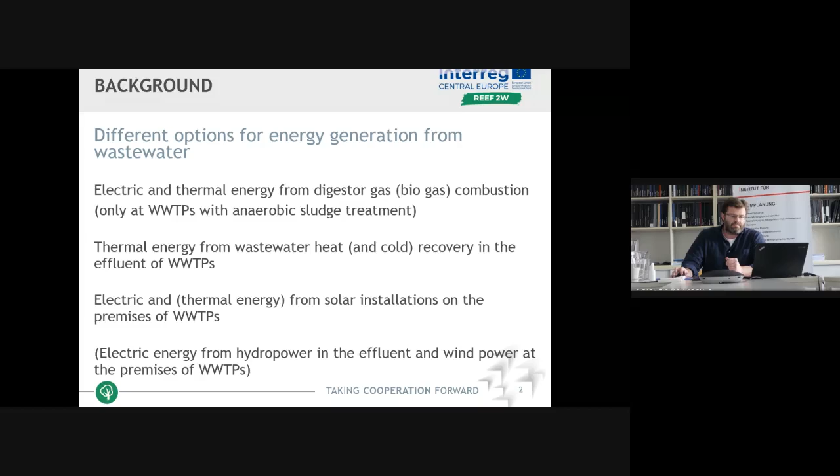Interesting for us is the digester gas, the heat recovery from the effluent, and the solar energy generation, the photovoltaics, and this will be addressed in our project and in this presentation now. So we're dealing a lot with energy from wastewater or energy from waste, and we should develop a strategy and things like that.

And the question is, okay, is it worth doing all these efforts? Is it a considerable amount of energy which could be activated with our approach, or is it just peanuts and low-hanging fruits are somewhere else? So therefore, before we develop a strategy, we just want to also provide an overview.

What is the potential we are addressing here? You will see this is quite significant, so it's really worth having a look into this topic.

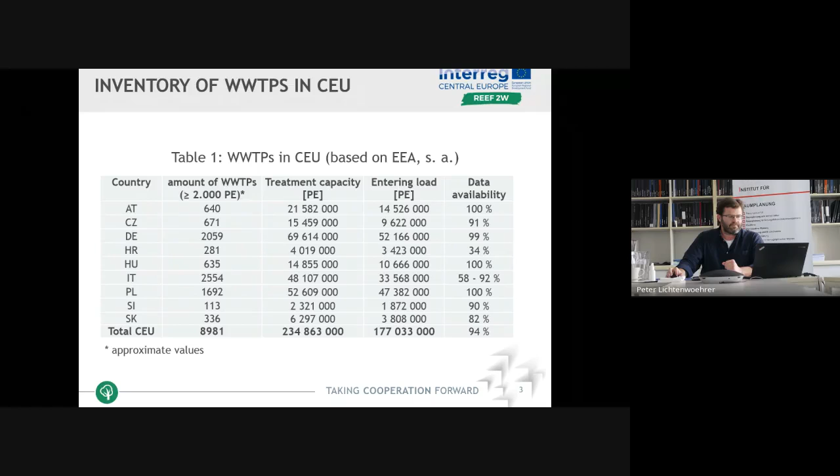They can consider all these energetic aspects, these spatial aspects, renewable energies in designing their plants. So I think Croatia has a very good base now to also apply what we suggest in our REEF2W project. So this is about the inventory in our program area.

For the collection of the potentials, we also want to know the wastewater flow. We made some assumptions how to calculate these wastewater flows, and we have to know what treatment plants are already equipped with anaerobic digestion. This is not from the European Environmental Agency database, but comes from national databases or expert knowledge. What we can see is that in our program area, we have about 900 treatment plants now already equipped with anaerobic digestion.

The shares also vary widely. In Austria, about every fourth treatment plant is already equipped with anaerobic digestion. In other countries, there are still very low numbers. So in total, concerning all the treatment plants in the Central European area, about 10% are at the moment equipped with anaerobic digestion. So there is still some potential to think of installing anaerobic digesters.

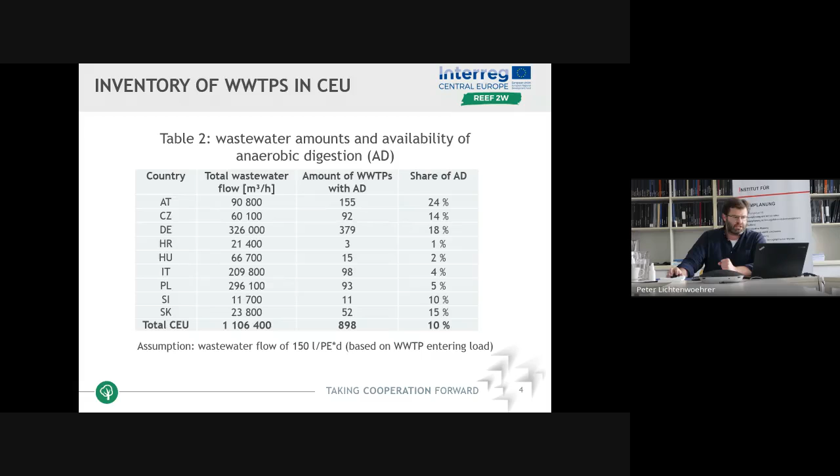This is okay also for the inventory. And now talking about the potential, this is the interesting thing. Out of the amount of digesters and out of the entering loads or the capacities of the treatment plants, we made some assumptions. I don't want to go into detail about the assumptions, but we made assumptions to calculate the amount of digester gas being produced, to calculate the potential for electricity and heat generation out of the digester gas, and the potential for wastewater heat recovery and for electricity generation out of photovoltaics.

The figures here, I think, are quite interesting also in the context of developing a strategy, because it gives us a good idea of what amounts of energy we are talking about. So when discussing biogas upgrading, we see there's quite a nice figure of gas available at the treatment plants across our program area. Also when dealing with electricity generation out of digester or biogas combustion or PV, we see there is quite a potential for electricity generation.

But what we also know is that the electricity which can be provided will be needed at the treatment plant itself anyway, at least to large extents. What is of very, very big importance and interest is this big amount of heat which can be generated out of the wastewater heat recovery and also out of the digester gas. So we have more than 40 million megawatt hours per year, which can be generated or recovered from the wastewater.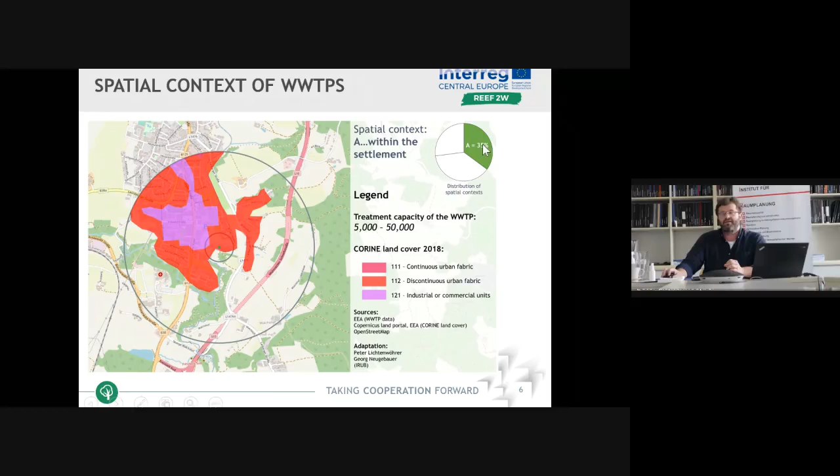Our spatial analysis showed that of the several thousand treatment plants we analyzed in the program area, more than one-third of them are within the settlement. So actually the treatment plants are very, very close to potential consumers. This is a very promising figure we can build on.

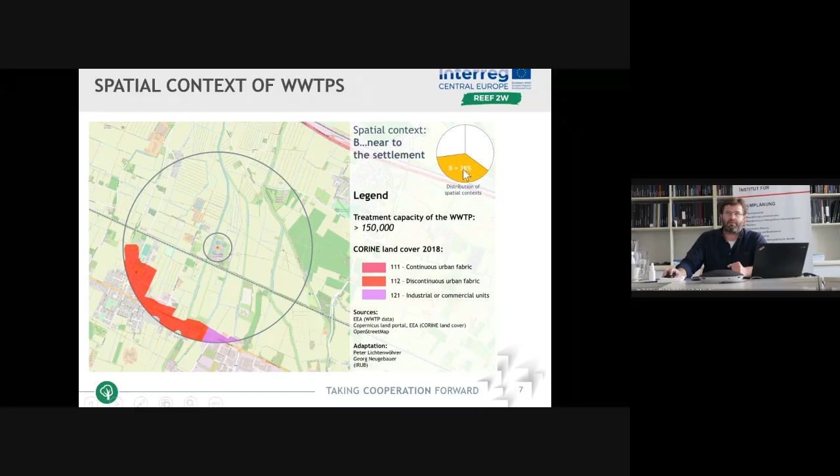Going one step further, treatment plants in close vicinity or near a settlement—less than 1,000 meters supply distance—another third, or even more than a third, are near to settlements. And concludingly, the third category, far from settlements, is almost only a quarter. So more than two-thirds, almost three-quarters, of all the treatment plants in the CEU region are within a settlement or close to one.

So from a spatial context, the urban compatibility assessment can conclude that, from the spatial point of view, the distance between the source and the point of consumption is manageable—this is no big deal. It's not only about supplying the electricity we have at the treatment plant, or the upgraded biomethane which could be supplied to urban settlements. It's also the heat available at the treatment plants in our program area, which can be supplied to surrounding settlements. So the question of space is no big deal, it can be done.

Concluding my part of the presentation, I can say the potential is here, especially the heat potential, and the consumers are here too. So it's really worth having a deeper look into the strategy—how can we manage to activate a broader use of the energy content of wastewater or waste, and what tasks or activities could be suggested to activate these resources and further establish our REEF2W approach.

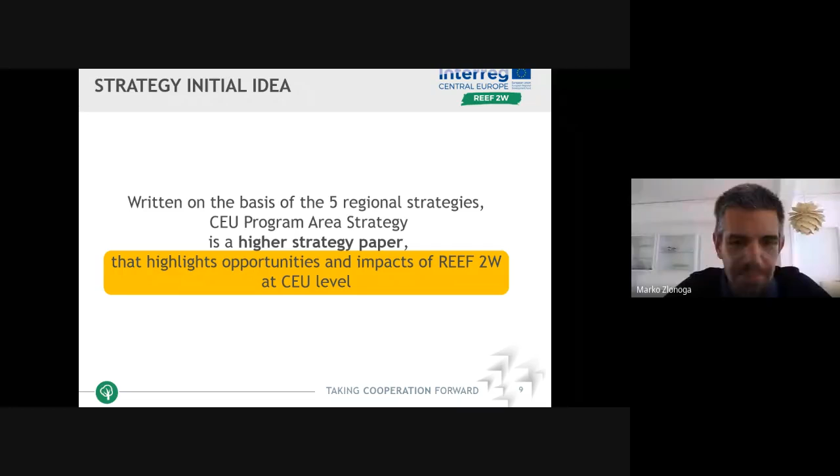And it is aligned with EU Directive 2018-2001 and goals of the European Green Deal. We try to contribute to the general and overall aim of the European Green Deal, which is decarbonization of Europe by 2050.

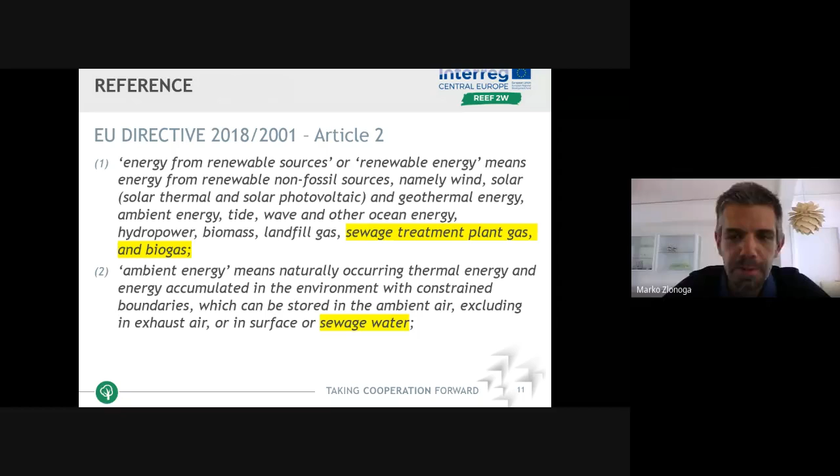Highlighting this first reference, EU Directive 2018-2001, Article 2, says in 2 paragraphs that sewage treatment plant gas and biogas, heat, power, and sewage water is also a renewable energy source. This is important because we need to harness all the potential we can to achieve those goals.

So we devised a strategy in 4 parts. I will go through each, since every part has its aim and its actions. First part is the legislative part. In order to do anything, you need to adjust the legal and policy framework to link energy, wastewater, and solid waste sectors to maximize their synergy and remove barriers for implementing joint renewable energy source solutions brought by REEF2W.

So we have 5 actions here. We need to identify all stakeholders on national levels, determine what support is needed for removing barriers, and increase support through additional regulatory pressure so things move faster. We need a combined approach across sectoral legislation and policy at various political and administrative levels, connecting them, and make legal and policy preconditions for every phase of implementation, including sludge treatment.

This is, for example, a very important topic, as Bojan was mentioning, in Croatia, but I know it's also important in other Central European states. And we need integration of wastewater as a renewable source of energy, both in legal framework, but also in energy planning and spatial planning framework.

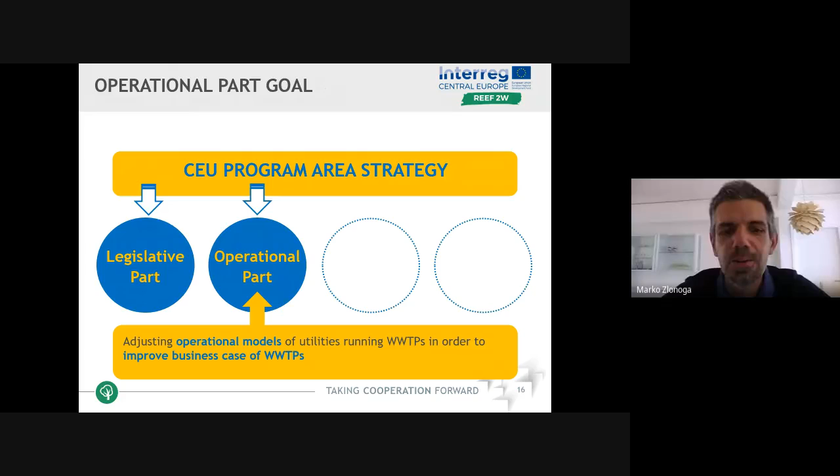Number 2 is the operational part. What we need to do is adjust operational models of utilities running wastewater treatment plants in order to improve the business case of each plant.

So how do we do this? We adjust regulations so that utilities running wastewater treatment plants can also invest in waste-to-energy solutions. We apply renewable energy solutions based on electricity, biogas, and heat produced from wastewater. I think Florian elaborated much more on this before. We need to enable feed-in so we can feed electricity and gas to the grid, and establish municipal separate collection of solid waste to add bio-waste from municipal waste into the chain for anaerobic digestion in the plants, making a bigger impact.

And we offer a holistic approach to sludge disposal. What comes out of it is that we support domestic economy, decrease dependency on energy imports, and foster innovation and research.

Next, there is number 3, the financial part, which is of course very important because you cannot do anything without financing and money. So we need to provide sufficient, predictable, long-term financial models and support for RES implementation, tailored to the synergy of energy, water, wastewater, and solid waste sectors.

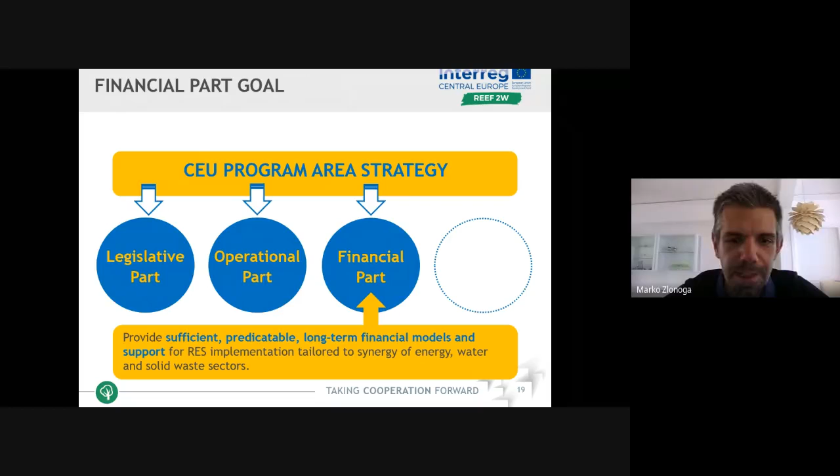How do we do that? We have only 2 actions, but they are big ones. First, establish clear subsidies, co-financing, and other suitable financial models connecting European Union and national levels that will foster investments in renewables in the wastewater treatment sector and broader, extending to all waste-to-energy solutions for bigger impact. Second, establish and promote public-private investment models such as public-private partnership, energy performance contracting, or other community-based investment models that involve as many citizens as possible.

The last part, but not least important, is the connection part. We call it that because we want to connect all stakeholders from the energy, wastewater, and solid waste sectors through national platforms. Each country needs a national platform, increasing information, communication, education, and therefore capacity building.

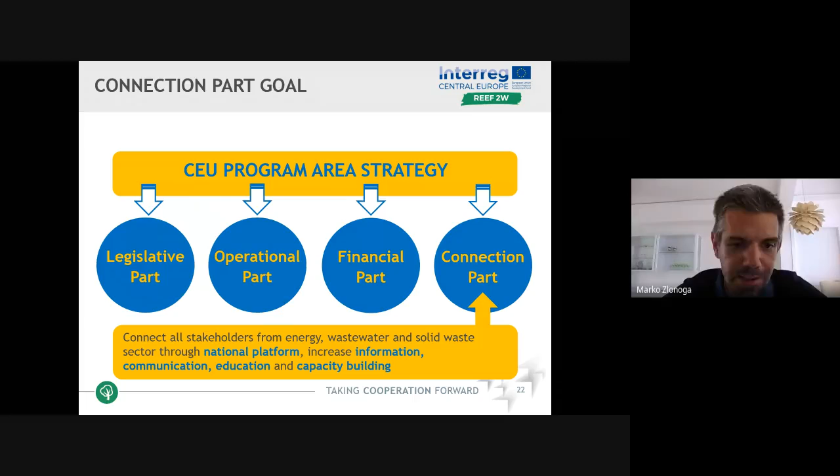So we establish a national platform connecting all stakeholders, both public and private, regarding energy, wastewater, and solid waste sectors, and others not mentioned here but crucial. Then we raise awareness through communication, promotion, and education that improves overall capacities. One great idea is to establish a buddy system matching unexperienced utilities and stakeholders with experienced ones, enabling transfer of knowledge and experience.

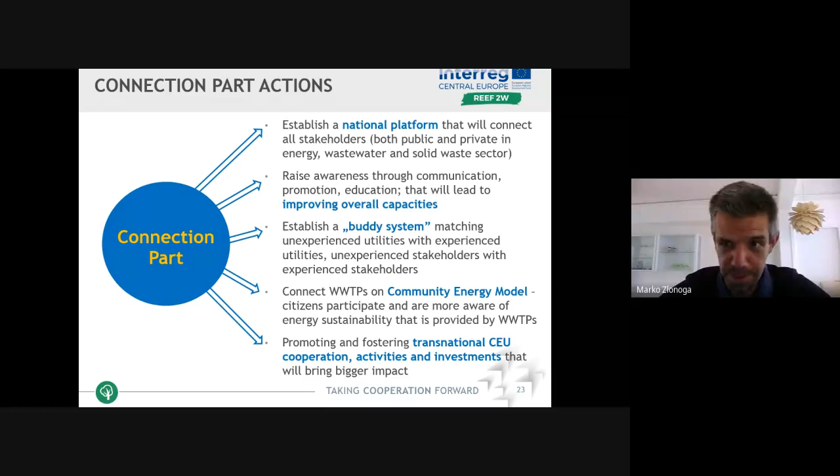Then we need to connect wastewater treatment plants on a community energy model, so citizens participate and are more aware of the energy sustainability provided by these plants to their communities. We also cannot stop with transnational cooperation—all this has to promote and foster transnational and broader cooperation, so activities and investments bring a bigger impact. I'm not talking about doing this within national borders, but broader, as we did in this project.

So Florian, you can continue. Yeah, I will continue—energetic potential. This was quite a lot of information, summarizing what was said.

Our estimations on the available potential showed that we have really large amounts, especially of thermal energy available at our treatment plants in the project area. It's really a good idea to activate this potential, which is still fairly unexploited, because it can contribute to the energy transition and play a role in a more climate-friendly energy system of the future, not only in our single countries, but in our entire union.

As you saw, we structured the strategy in four major parts: a legislative, operational, financial, and connection part. I would like to stress once again this directive of the European Union that recognizes wastewater as a renewable source of energy, and we must take point of that and use this to harness the potential that we have for renewables in this sector. We need to link the energy, wastewater, and solid waste sectors in a spatial context.

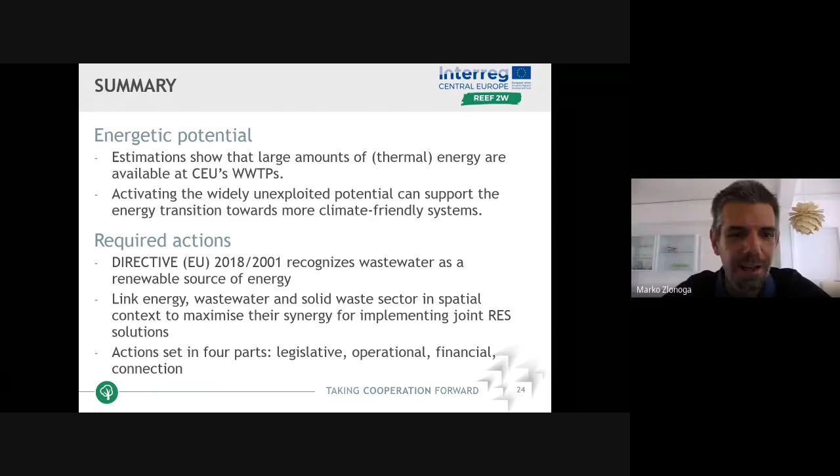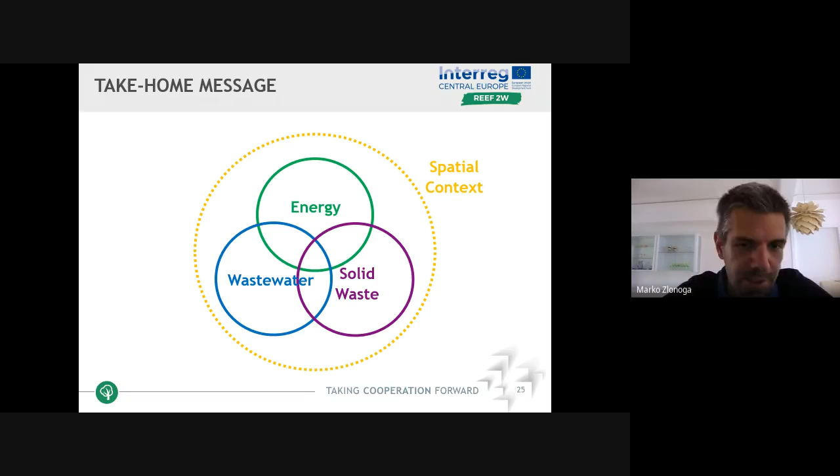This is our take-home message. In spatial context, having in mind, we are merging energy, wastewater, and solid waste, having bio-waste especially in mind, so that we can fully use the potential that Florian was talking about and harness as much out of it as we can. That's what we had, thank you for your attention.

Thank you, Florian, and thank you, Marko, for showing the broader picture of the outcomes that we achieved.

In the meantime, there have been some comments in the chat that I want to raise. The first question, asked some time ago, was if the integrated sustainability assessment will also be used after the project, or what are the plans for this. Can someone reply on this?

Well, I can start. When dealing with energy supply and the energy transition, as our last slide and take-home message was, you have to deal with different aspects. It's not only about finding sectoral solutions, but it can only be a sustainable solution if it's a multidimensional solution. The ISA, the Integrated Sustainability Assessment, is one suggestion, one idea of how one can integrate different perspectives in the assessment process. Of course, there are different ways to integrate different views. ISA can be one thing. This is our suggestion; if it's applied, it's fine.